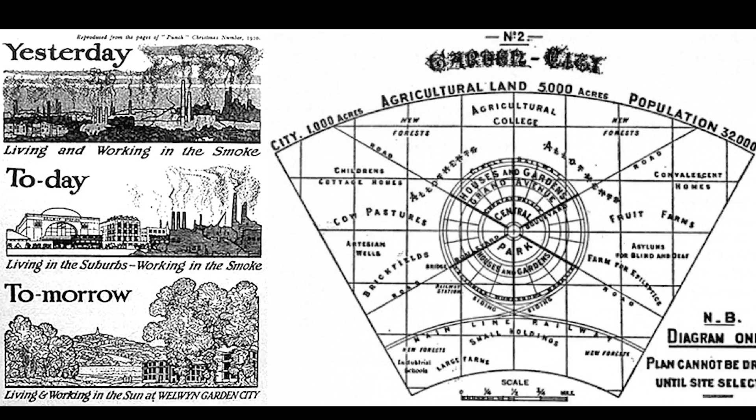Now, a lot of that narrative has been around utopia. So here's just a few utopian visions. Ebenezer Howard, Garden Cities of Tomorrow—how to make a utopian suburb outside of London.

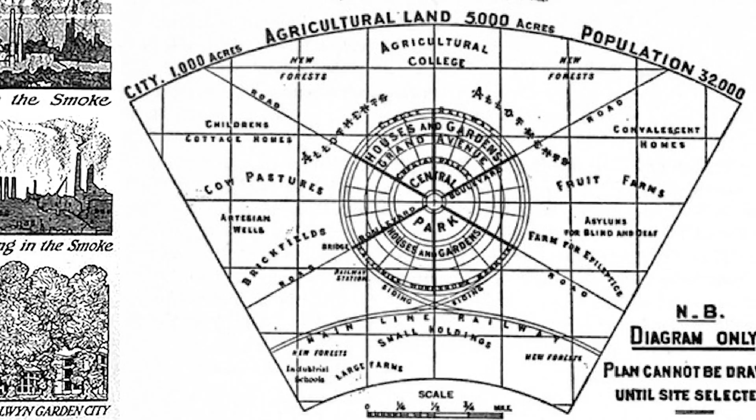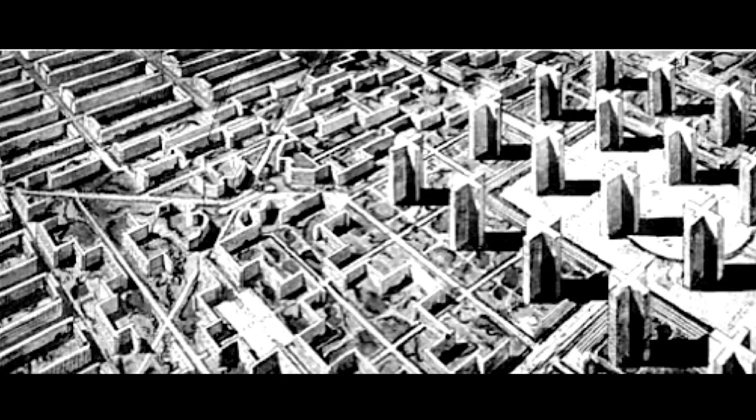Le Corbusier, this Ville Radieuse, an idea for the ideal city where we could all live in towers surrounded by park space, and we could drive around in this new thing called the automobile, and we could avoid public transportation, and we wouldn't have to have carriage houses for horses and all those animals.

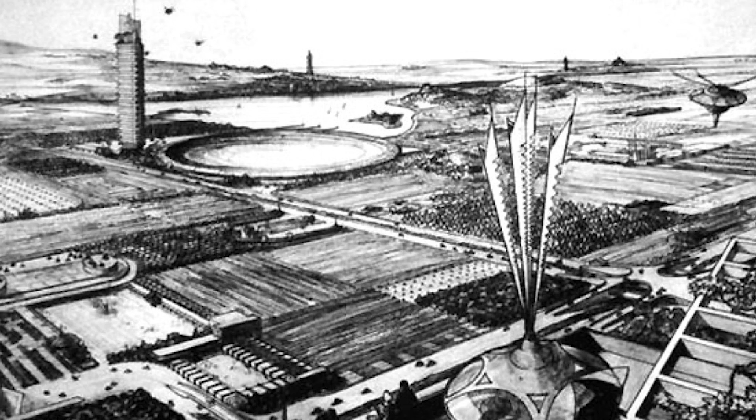This was like the height of modernism and progressive thinking. We've got Frank Lloyd Wright out there thinking about a little more of a suburban ideal, about how we could still maintain open space and a place to grow food—building on this Jeffersonian idea that we could be self-sustained with our little tiny farms. Effectively, that's what your suburban house is, right? A farmhouse on a tiny, tiny farm that's not really enough land to grow anything on, but that's perpetuating this ideal of land ownership in the West.

A little more contemporary, Paolo Soleri out with Arcosanti—this idea of, we're going to abandon Phoenix and go find a better place and build a utopian community filled with Waldorf schools and biodynamic gardening and rammed earth housing. Basic idea: all the cool people will go out there and live in an awesome building, and we'll leave that icky city of Phoenix behind.

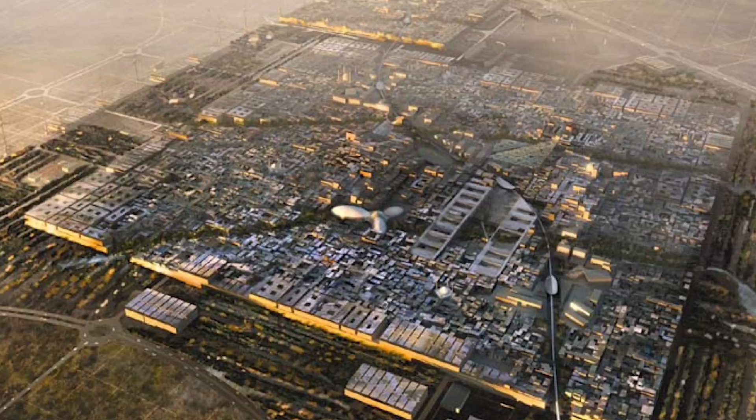And then bringing us up effectively to modern times, this is an image of Masdar in the Emirates, our latest cut at urban sustainability. It's a little patch surrounded by the existing city that has incorporated traditional Islamic design as well as different technologies related to transit, daylight harvesting, movement of air, and solar panels.

So we get these examples of either visions or built places that are meant to be the utopian ideal. My challenge is that when you look it up, utopia means no place or nowhere. So many of these things are not authentically of a place or have never even been realized. I'm interested in being somewhere, being place-based, rooted in history and culture, and I think that's the city that we already have, and that's where it's exciting.

So this is what we're working on at Global Green, this idea of green urbanism, bringing together nature and city, ecological processes, and the dynamism of urbanism. You can see our definition up there: a practice of creating communities that are beneficial to people and the environment. We think it's a practice, a thing you do.

And when we do it, we ask these four questions: Are we increasing natural capital? If I had more time I could explain what that means, but it's all the free stuff that nature gives us. Are we increasing the connection between ourselves and nature? Are we increasing social equity? And are we creating more stable and resilient economies?

This is built on the idea of urban ecology. This is a foundational principle for our work, to give it some scientific grounding, the ecology of cities as a human-created ecosystem, rather than looking for little pieces of ecosystem in the city. Let's say this is an ecosystem, let's think about it like that, apply science, bring our smarts to this idea of sustainability so we can answer the question: how do we green out the city that's already there?

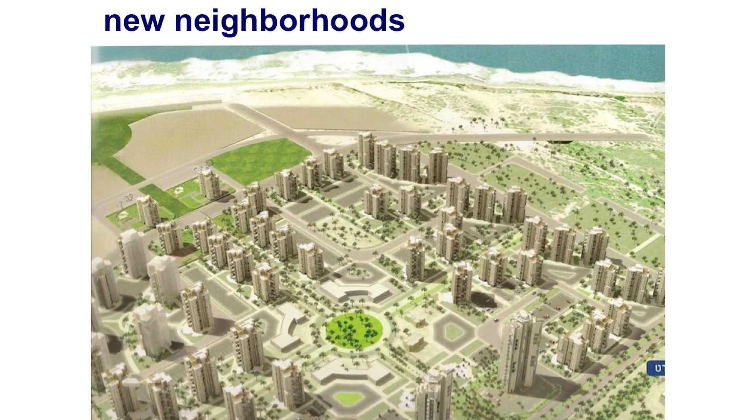And this kind of development is not sustainable enough in the way we look at it. We face a conflict between the need to find housing solutions and the threat of losing our open spaces to new neighborhoods built on vacant land. Another conflict we face is between regeneration of existing neighborhoods versus the easier solution of building new neighborhoods.

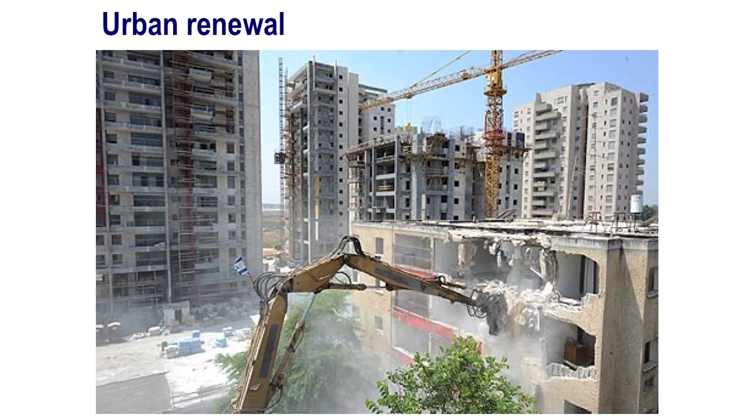Regeneration can take different directions, and the considerations should be local, with very different considerations. This is one option: demolition of old housing stock and building new neighborhoods.

But on the other hand, we have some very good experience, for example in the city of Tel Aviv, with a policy of adding new stories to existing buildings without demolition, bringing through this intervention new population, money for building renovation, and sustainable regeneration.

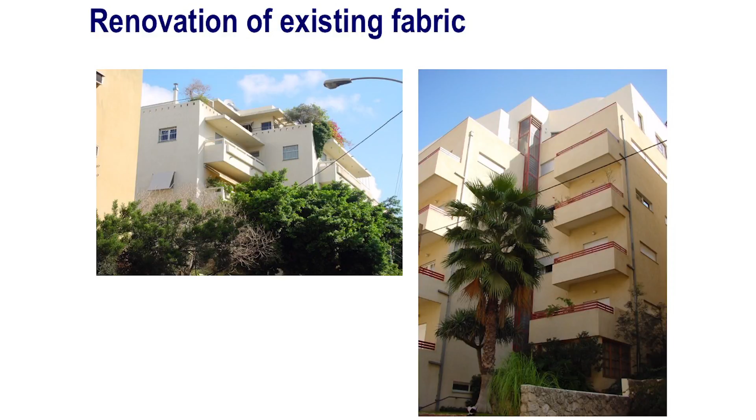So there are big conflicts in terms of how to create our regeneration and our supply. These are very long processes. What you see here takes a long time, but gives a very good result for the city. So there is a conflict between our need to enlarge the supply and this kind of solution.

We are concerned by equal distribution of population nationwide and within our cities. And we suffer, as many other cities, from traffic congestion and the lack of a good enough system for public transportation. This is a crucial threat, and we are working on that.

On the other hand, I want to be very optimistic. There are many strengths and opportunities in Israel. The Israeli society is a young society, a very dynamic one, ready to adopt new ideas and lifestyles. We have to take advantage of these characteristics and create policy for a sustainable environment for our cities.

We at the Jerusalem Institute for Israel Studies are looking for tools to make our cities more suitable for sustainable lifestyle within our constraints, limitations, and national goals. Our urban sustainability project assumes that behavioral changes are the key factor in achieving a more sustainable world. We are looking for behavioral tools for consumption reduction and for living a better life within our boundaries. We are not dealing only with technologies, we are thinking about the human part of sustainable lifestyle.

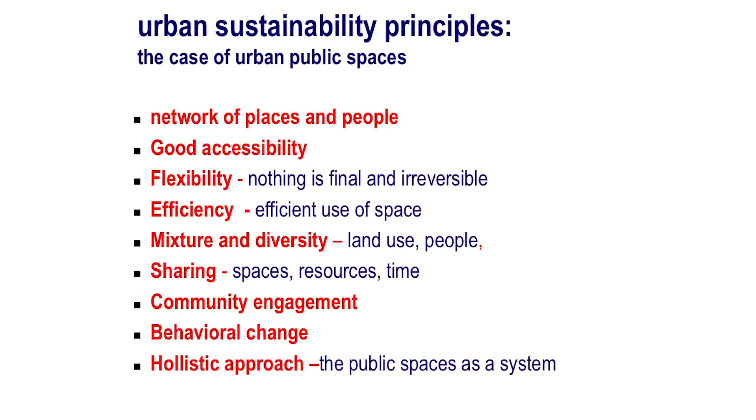You heard about it in the first part of the day, because nothing today is final and everything has to be reversible. And this is very hard when you are talking about building the city. Efficiency is a very important issue, I'll talk about it. Mixture and diversity and sharing. Community engagement has to be everywhere. And behavioral change is something we have to take into consideration when we are talking about change.

And all this has to be in a holistic approach, because the city is a very complicated organ and things are related to each other. I'll try to touch upon each of these issues, and my examples will be some from Israel, from Tel Aviv, and from other places in the world.

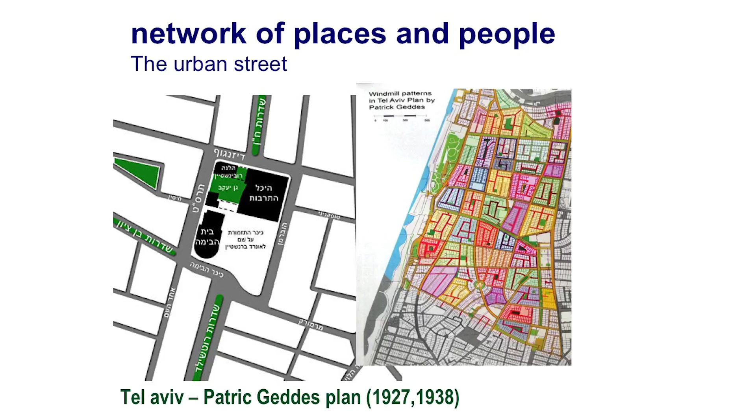The case study of planning the young Tel Aviv during the 20s to 40s of the last century—if somebody knows Patrick Geddes, he's an English planner who planned the first neighborhoods of Tel Aviv—was a very good example of the concept of mixed land use and urban vivid streets. The basic structure of the city was based on its strict street network.

The street is an integral part of the city's public space and is the most accessible and friendly place for everyone. The urban street is the best connection between different parts of the city. There are very good examples of successful streets in the inner city of Tel Aviv. A good mixture of dwelling, CBD functions, and commercial strips creates a vivid and attractive city center. This was one of the main reasons, not the only one, for the city becoming the most attractive place for young people in Israel to live in.

Another example from Israel: Jaffa Street in Jerusalem, the main street of the inner part of the city, went through an extensive regeneration process with the introduction of the light rail. The street is now a pedestrian mall with no private car access, and it's becoming more and more attractive—a good place.

The growing use of non-motorized transportation has a great influence on the functioning of the urban fabric. It's very developed already in Tel Aviv, less developed in other cities in Israel, but it's one of the most important tools that we have to continue to develop.

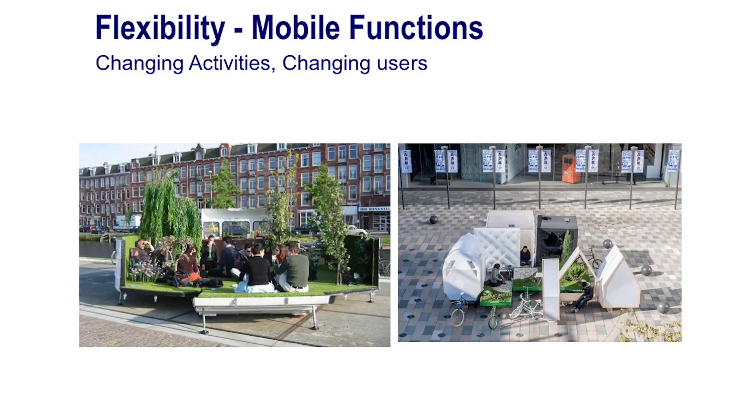These are examples of mixing public and private use through temporary residence. On the left, a gathering place in Holland, and on the right, temporary housing on a public lot in China. It shows the idea of temporary use, of flexible change.

There are other examples. This is from Tel Aviv, an example of a mobile function: a mobile library that goes everywhere. This is on the seashore now. It can be everywhere, and it can be good for the users wherever they are.

Meanwhile-use is a very important tool in big cities, or in cities at all, when there are changing needs. The main challenge is to use these places for different purposes, also on a temporary basis. This is a new example from Jerusalem, where an old school became a place for artists, and it might become something else in the future. The issue here is really flexibility.

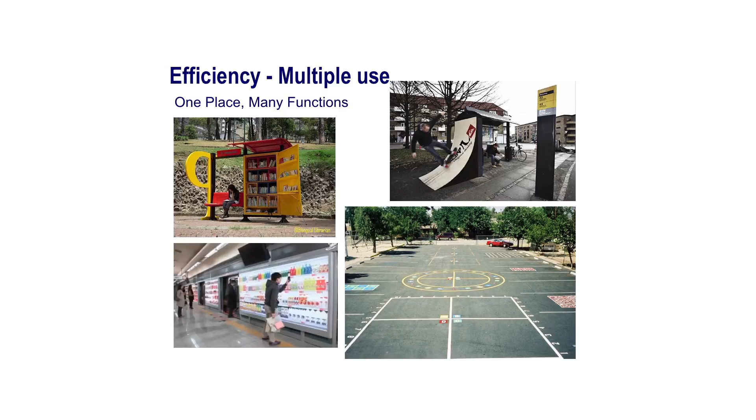On the right side, you can see a parking lot that can become a sport center instead of parking, so you can do both in the same spot. You can do many functions in one place, such as using this public open space to recharge your telephone.

Another important thing, at least in Israel, is how we use public buildings. We don't want to see public buildings used only part of the day. For example, kindergartens that work only until the afternoon should be used all day for other public purposes. It's easy to say, hard to implement, but a lot of effort is being made to really use our public buildings all day.

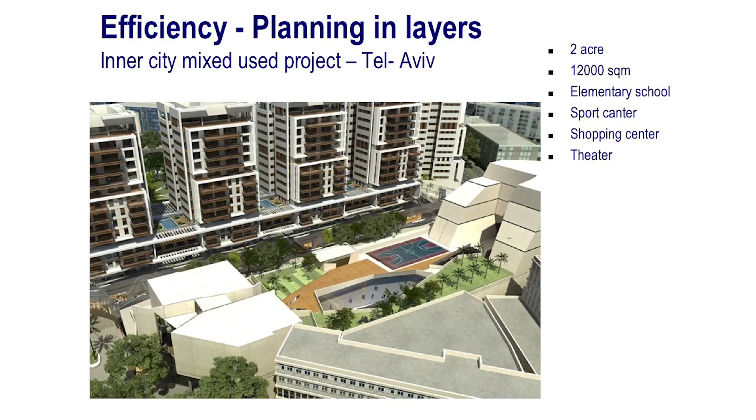In terms of planning, we are facing new projects in Israel that are trying to be very, very dense. This is an example of a project now under construction: on the same 2-acre lot, there's a sports center underground, a shopping mall at grade, and above that an elementary school with its open space on the roof of the mall, and a cultural center on the right. So we have 12,000 square meters on 2 acres in the inner city, and it's new — a new kind of development. We hope it will work.

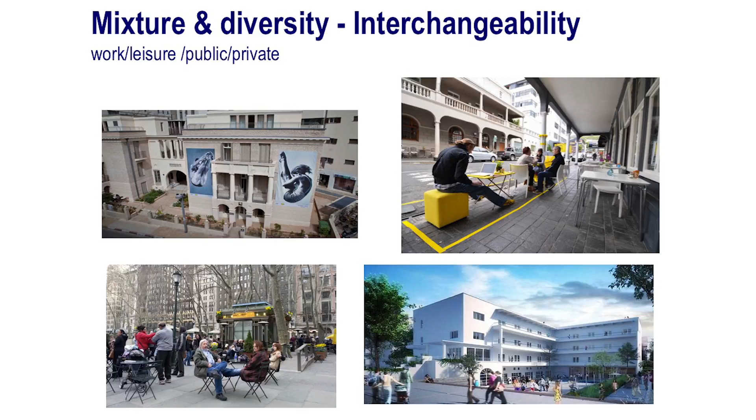They are very flexible and ready for change in their uses. Looking inside the buildings, you can see the option of changing the building to be a working place on the left side, or just a gathering place on the right side — when you take the desk and put it up, as you can see on the right. These are all efforts to use the same space in a very flexible way.

And you can serve planning goals through this concept — for example, to get less place for cars and more place for people. You can see it in New York, in Manhattan, on Broadway.

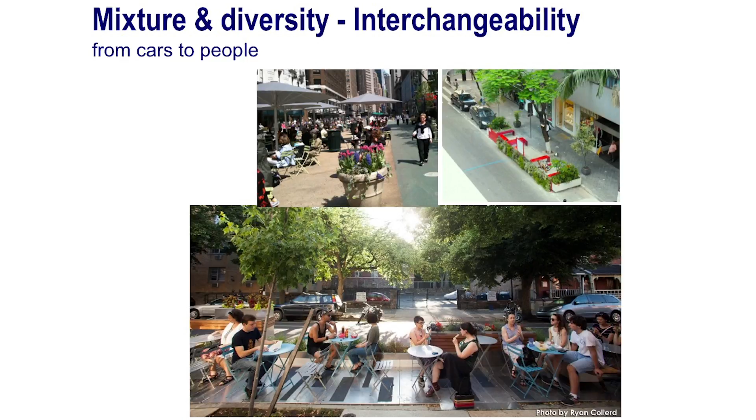All the way through Broadway, you can see how places for cars are becoming places for people. The parking places on the right hand will become just places for people to be. You take the same place and change its goal.

In Tel Aviv, we've had it for a few years, and it's quite a successful way to use our assets in a sharing way. One of the main and important things is how we engage the community to be part of our public space life.

On this issue, we have lots of interesting processes going on in Israel, especially in Jerusalem and also in Tel Aviv. We have community gardens, like 70 community gardens in Jerusalem that are very, very active.

We have a wave of urban agriculture that is starting to come in. We have the roof of a community center in Tel Aviv that is devoted to urban agriculture now, and lots of community grassroots activities that have to be adopted by the municipalities in order to make it grow.

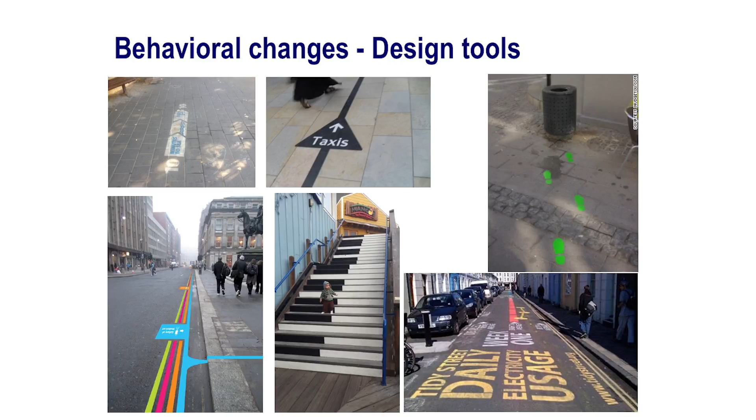The right one is a sign to get to the garbage can in Copenhagen. So design can be a very good tool to change behavior towards sustainable behavior.

Another example is how to create the idea of drivers slowing down near a public school in England somewhere. This is a kind of nudge tool that makes you change your behavior without saying don't drive over 50 kilometers per hour. Just the signs, the atmosphere, might change your behavior.

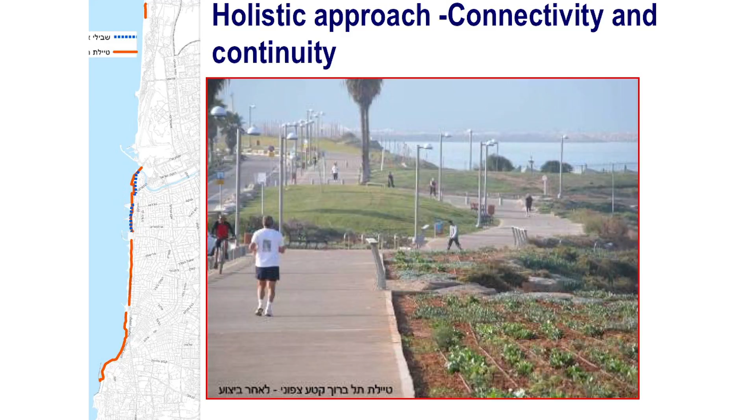I'd like to finish with a few words about the holistic perception. All these tools are very different and very nice, but as a planner, if you want to reach your strategic goal, you have to look at the whole picture and not only at the different parts of it. This is an example from Tel Aviv, when the city decided to set a strategic goal to make all the seashore continuous.

This strategic goal made the city carry out many plans and implement them along the seashore. Today the seashore of Tel Aviv is 13 kilometers long, all the way from north to south, with a walking path and bicycle routes. It's a very nice environment to walk and bike in, and it helps change behavior.

As a planner, I can say that strategic planning that takes all these things into consideration is very important for seeing how you reach your goals.

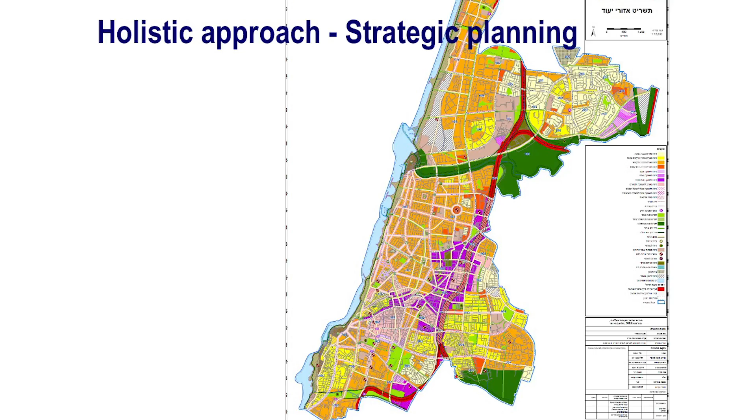To sum up: sustainable urban public spaces are key elements to achieve good quality of life for city residents while keeping our planet within its boundaries. Human behavior is a crucial factor in promoting change. The principles suggested might contribute to achieving these important goals and bring the world to a better future. Thank you.

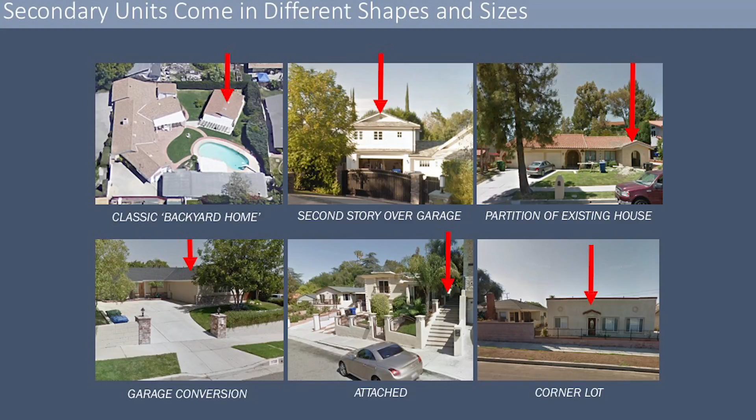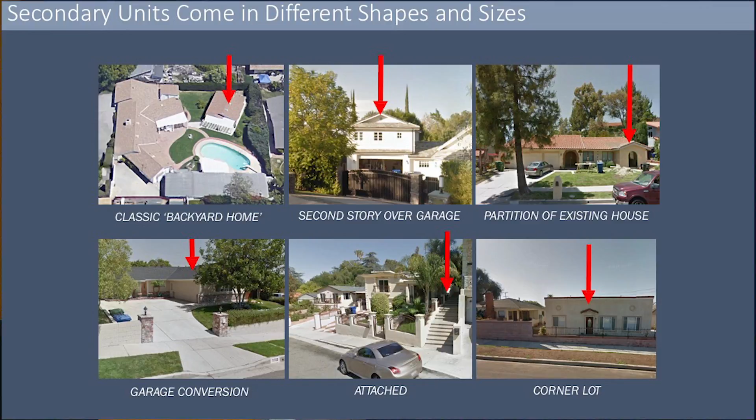Here's an example - here's some pictures of secondary units in Los Angeles. No disrespect to any of the people that built those, but here's the quality of design on those being built in Portland. The role of design in helping strengthen the market for secondary units is really important, both from a sustainability point of view, but also because people in Los Angeles can be fearful, and it's understandable, about neighbors building things in their backyard adjacent to them. Great design helps reduce some of that friction that can happen, and I think Kevin will talk a little bit more about that.

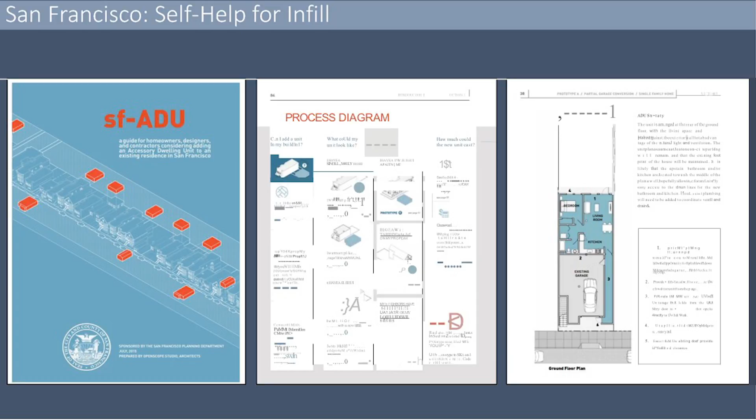Secondary units are a housing strategy emerging mainly on the West Coast, but throughout the country. San Francisco has been addressing it too. They've created a user-friendly how-to guide for building secondary units on your property, designed by architects - here are some examples. We're going to do the same thing here in Los Angeles once we finish our prototyping project.

I'll briefly go through the innovation team's end-to-end approach. We have the benefit of being inside the City of Los Angeles government, partnering with the city planning department and building and safety to roll out new business processes. But we also have the flexibility, because we're funded by Bloomberg Philanthropies, to partner with great architects like Kevin Daly, UCLA City Lab, and LA-Más.

Reading left to right, some of the things we're doing for the secondary unit project involve looking at our zoning code changes. I mentioned it's legal, but there are still barriers in our zoning code that we're working with our city planning partners to address.

We've developed innovative financing mechanisms. We did a focus group with folks who have built these units - zero got a conventional loan, so there's not really a market for these things. They're financing through cash or home equity lines of credit. For our prototyping project, we've partnered with Genesis LA, a community development financial institution, to provide construction loans.

We're helping improve permit tracking to get to the mayor's point about measuring good work, and marketing existing opportunities to homeowners. Another barrier to secondary units is no one knows about it. So helping people understand it's possible, and how to do it in a way that's context sensitive and resource sensitive, will be a benefit.

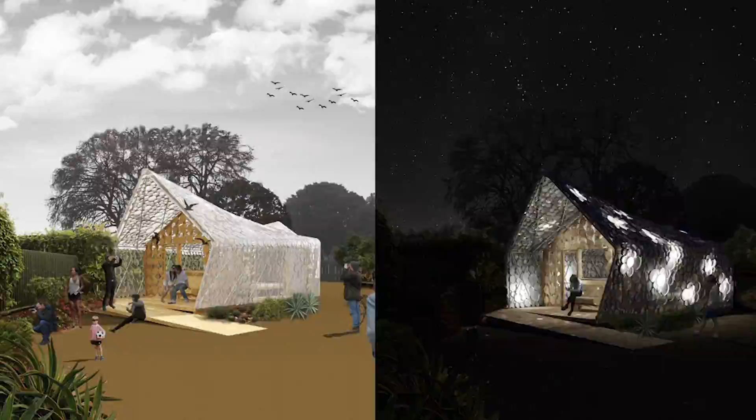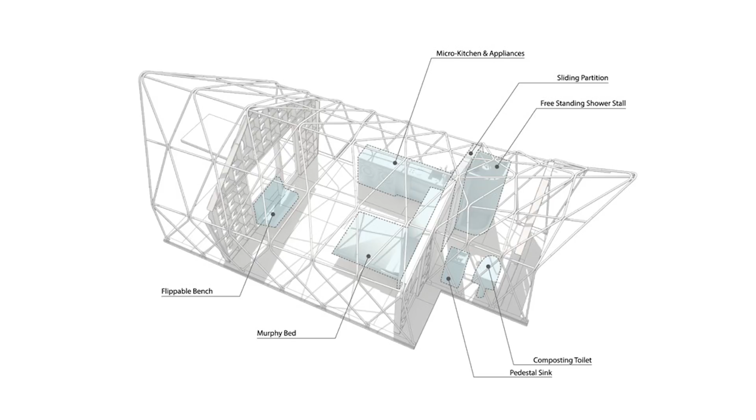What we're imagining, in this particular prototype, is a very light kind of frame that's almost like a tent. It has to have the environmental performance to make it a conditionable space, but just within that, enough of a canopy to facilitate a naturally ventilated building with an intelligent skin. So this is a building made of two fabrics, slightly translucent, separated by a series of spacers, with a vacuum applied between those two fabrics.

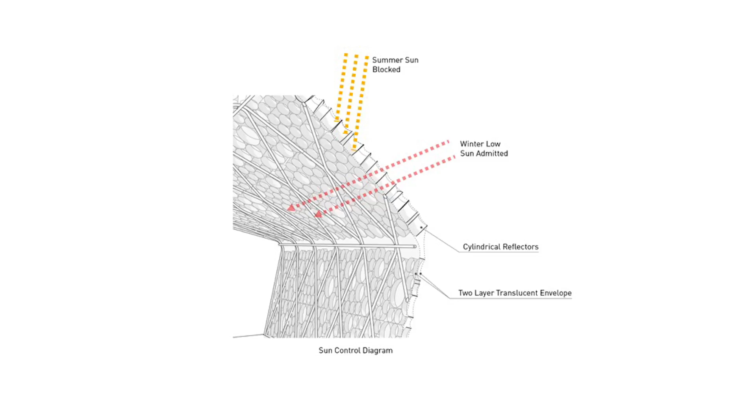That creates enough of an environmental barrier so you can start to condition the space. But that spacer also helps control light and sun as it comes in, and it can incorporate lighting. So really what we want to do is focus on the skin, the envelope, and the environmental characteristics of the building.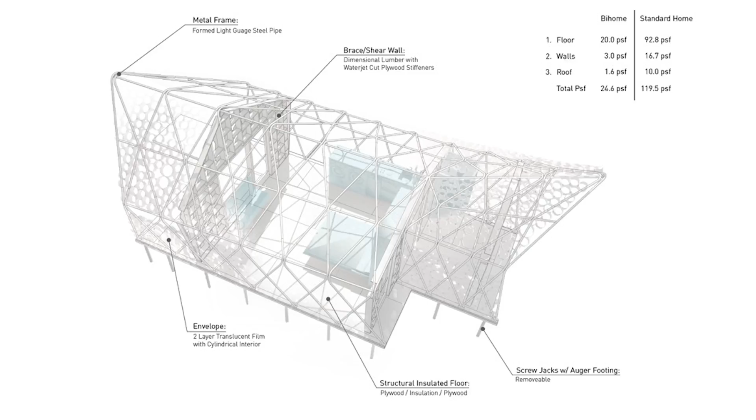But more than that, going back before the case study program to theorists like Buckminster Fuller, who introduced this idea—ma'am, do you know how much your house weighs?—we feel it's time to reconsider that, not just in terms of engineering performance, but because engaging the pure material intensity of buildings is the only way we're going to make significant environmental improvements to the way we build.

So we feel architects ought to know how much things cost per square foot. Homeowners, everyone knows that, but how much do they weigh? What we've tried to do is configure a building that would allow us to eliminate concrete, first of all—the biggest generator of carbon dioxide in the construction process—by using a raised floor, a very simple framing system, and a very smart envelope.

What we've got is a building that weighs about a tenth of a conventional building. We had some engineering students at Stanford in their environmental program do an analysis of that. As you start reducing the weight of materials and construction by an order of magnitude, 10%, you start getting multiple orders of magnitude in savings in summertime smog production and all the other things that go along with making the materials we need to build buildings.

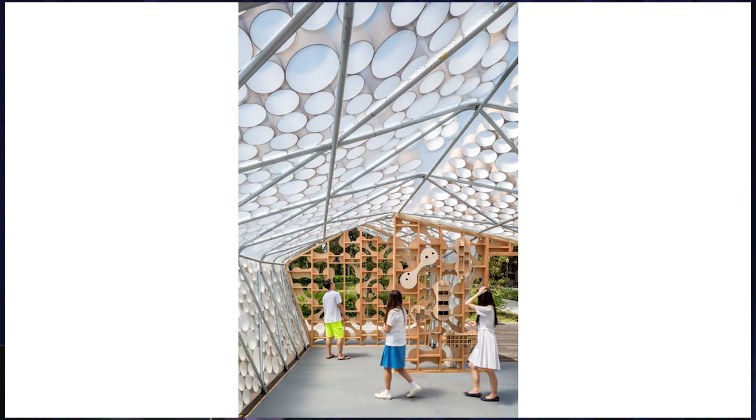So I think that's part of our goal as we move forward in the multiple shapes, configurations, technologies and strategies that will go into this kind of building. We really want to make sure we're also focusing on material intensity, so here's a little prototype that was built here on campus just last year in the courtyard of the Broad, by a team of students from the master's program.

You may be seeing something like this around now. The photographer stopped these students and asked about their clothes. I think there's a tradition in some boarding schools in South Korea to wear your high school uniform when you graduate, so that's what these guys were doing at this time last year.

But for us, let's see if this is going to play.

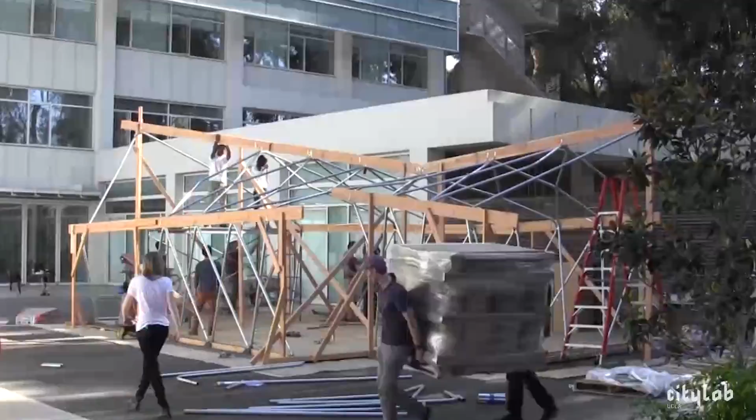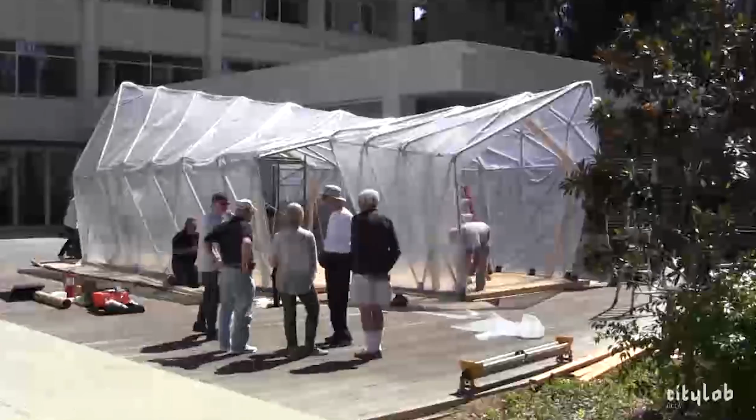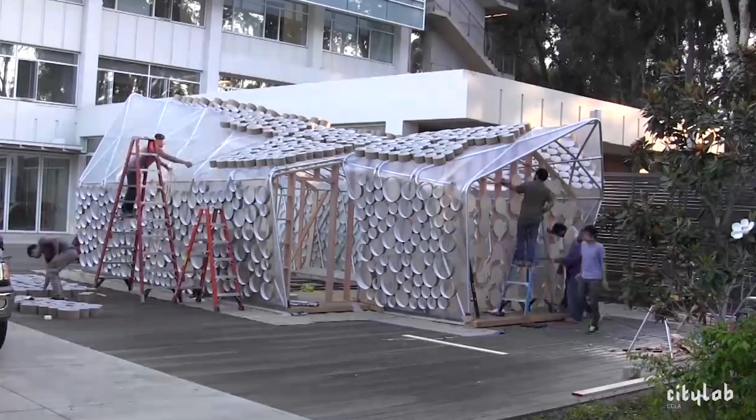Along with the idea of reconsidering lightness, recyclability and flexibility, we really want to make sure that as architects we're fully engaging the idea that we should be doing things differently. My feeling is that if a team of extremely motivated and well-intentioned but totally unskilled architecture graduate students can do something like this in less than ten weeks, once we open this kind of challenge to the creative community at large, we can really do a lot. So thank you very much.